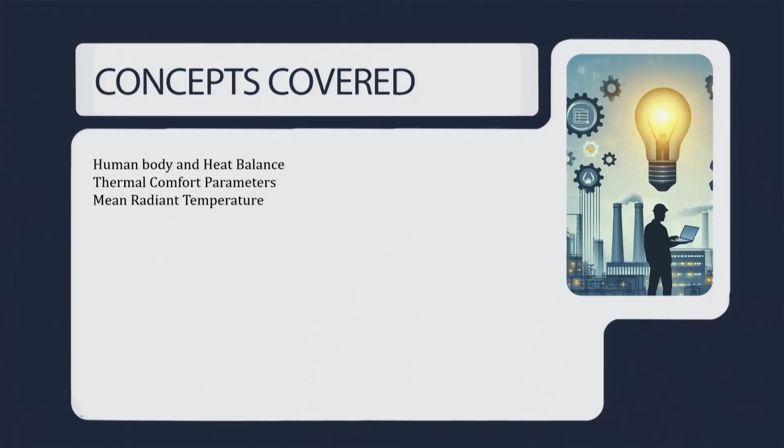So, we will see in this lecture the concept of the human body heat and the heat balance, mainly the thermal comfort parameters, and we will also see one very important concept, the MRT or the mean radiant temperature. In the introduction, we always talk about thermal comfort in our day to day life, and the scientific communities also talk about thermal comfort. How thermal comfort is defined is very important.

It says that it is the condition of the mind which expresses satisfaction with a particular thermal environment. It is the mind, and ASHRAE 55-2004 also stated it in a similar way as ISO 7730 has stated. It is the condition of the mind that expresses satisfaction with the thermal environment, and it is assessed by subjective evaluation. This is very important, it is a subjective evaluation.

So, a particular thermal environment in which I may feel comfortable, you may not; it depends upon a lot of parameters: ethnicity, the dresses, the environment, the way we have been brought up since our childhood. So, there are a lot of subjective parameters. Both codes state that as it is the mind, it has to be some kind of satisfaction of the mind. So, definitely the parameters have to be evaluated by some kind of subjective evaluation.

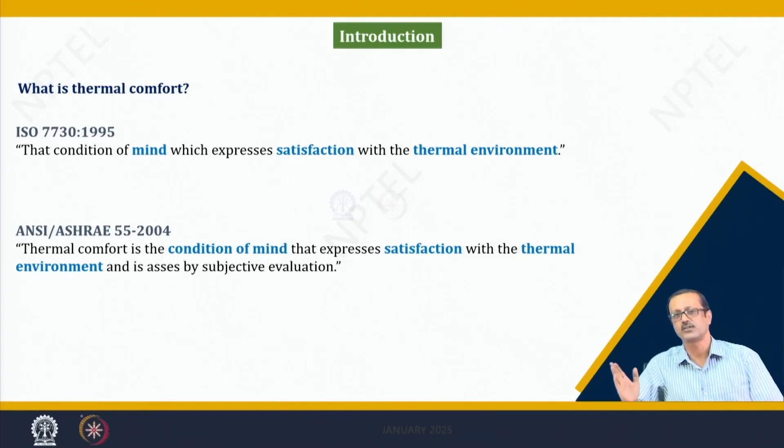So, let us see today in this lecture number 24 what the various parameters are. In lecture number 25, we will see the thermal comfort indices. So, this is the well defined equation that states the heat balance equation of a human body. In the left hand side there are many parameters.

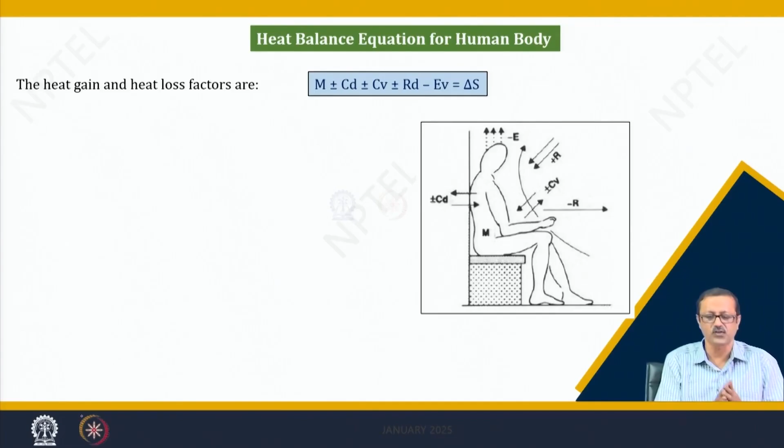It starts with a positive parameter, M. When there is a positive, there are gains. If there is a negative part, there are losses. So, what are the gains? M is always going to be a gain; M cannot be negative, which is metabolism. It is the human body metabolism that will produce some heat. Sometimes it produces a high amount of heat, sometimes it may not.

So, if we are very active, suppose we are running, playing some games, or working out in a gymnasium, the metabolism will be high. But if we are at leisure, sleeping, or sitting in a balcony, the metabolism will be much less. But this cannot be negative.

The next three parameters, CD, CV and RD, are the conduction, convection and radiation. They are sometimes positive, sometimes negative. Conduction is due to the contact temperature difference, between my body and the back of my chair. There may be a temperature difference, so heat will flow by conduction from one part to the other. So, there may be a chance of negative.

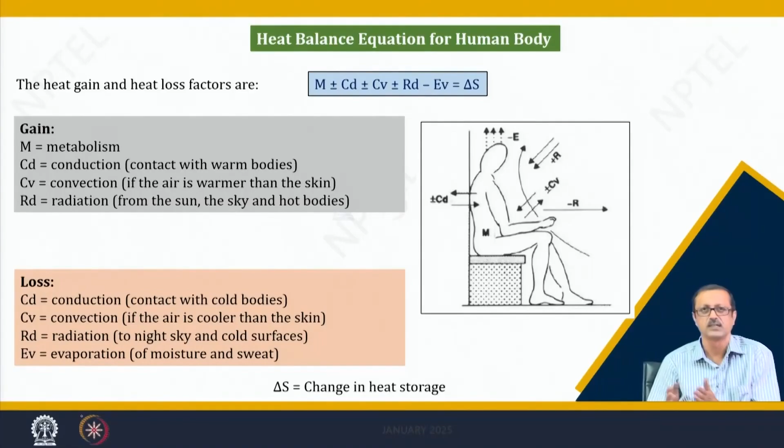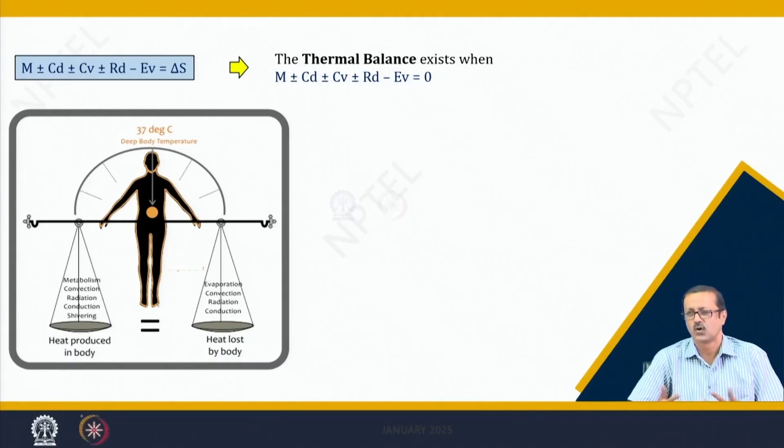So, delta S is the change of heat storage. Our body temperature is about 36, 37 degrees centigrade, around 37 degrees centigrade. There are some losses always happening, there are some gains on the other side. So, if it is thermally balanced, then delta S equals 0, and I can keep my body temperature exactly at 37 degrees centigrade, and probably I will feel very neutral. Of course, neutral is also a type of comfortable, that I am not going to feel any cold, or any kind of hot atmosphere.

How do these environmental parameters relate with these 4 things in my equation? Metabolism is not directly related to any environmental parameter, it is mostly a body biological parameter, and the evaporation is directly or indirectly linked with the dBT, air velocity, and the RH. So, if these are changing, the evaporation rate and everything is going to change.

Radiation between the two bodies depends on a temperature difference, and this temperature difference is sometimes an environmental parameter. Just now I told you, if there is snowfall outside and there is glazing, a window, and you are very close to the window, there is a change of radiation. The convection, yes, there is air velocity, maybe you are in a room which does not have any air conditioner, it has natural air flow. So, the outside dBT temperature will play a role.

There are some human parameters also. Metabolism is, of course, sorry, not psychological, it is the human physical parameter. So, it depends upon the surface area of the human being, the weight of a person, the sex, and the age of a person also.

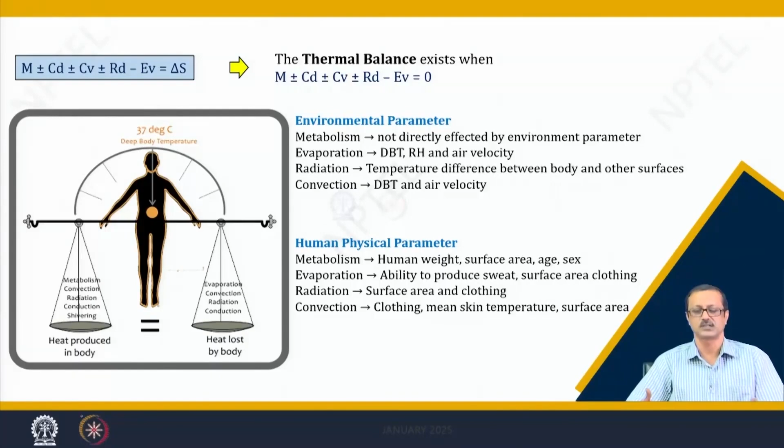The evaporation is also sometimes a physical parameter, its ability to produce sweat, whether your surface area is uncovered or covered with clothing. Similarly, the clothing and your surface area also come into the picture for convection and radiation. So, now if you see there is a balanced kind of scenario in this particular graph.

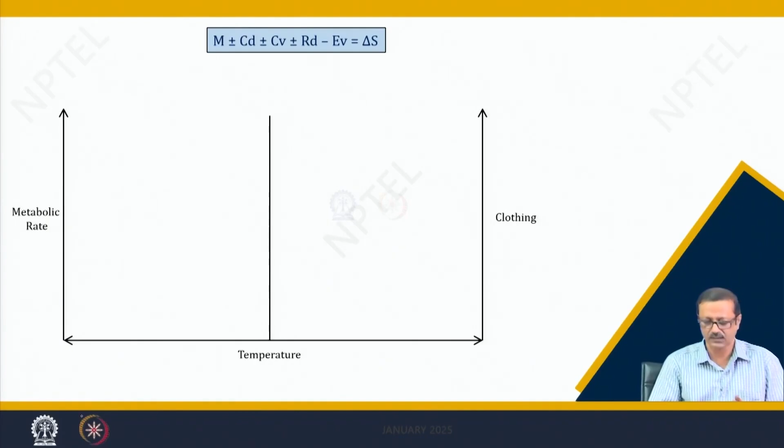On the x axis is the temperature, high or low, based on our body temperature, and at the top I have written down the human body heat storage equation. On the right-hand side of the x axis is the clothing, and on the left-hand side is the metabolic rate. The body temperature will be 37 degrees centigrade, the normal body temperature, when delta S is equal to 0. So your losses and your gains are almost equal and there is no delta S.

But if there is a hot condition, that means the room is hot, there are many more positives and fewer negatives. So this delta S has a positive value. If it is a small positive value, you can accommodate it. If it is a little bit more, you can still accommodate, but if it is finally very high, your body temperature is going to change, because delta S positive means your body temperature will now increase from 37 to 37.5, 38 like that.

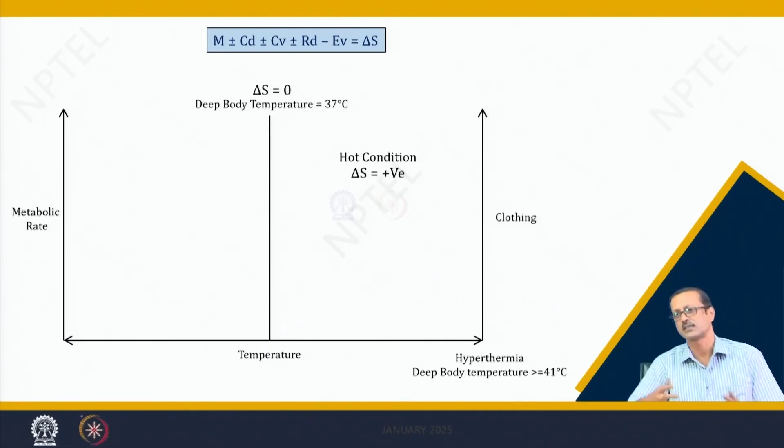And if the body temperature is more than or almost equal to 41 degrees, almost 4 degrees above 37 degrees, which is like a very high fever, you will be really in trouble. You may go into a kind of shock or trauma, sometimes known as heat stroke. In medicine or in our clinical community, they call that hyperthermia.

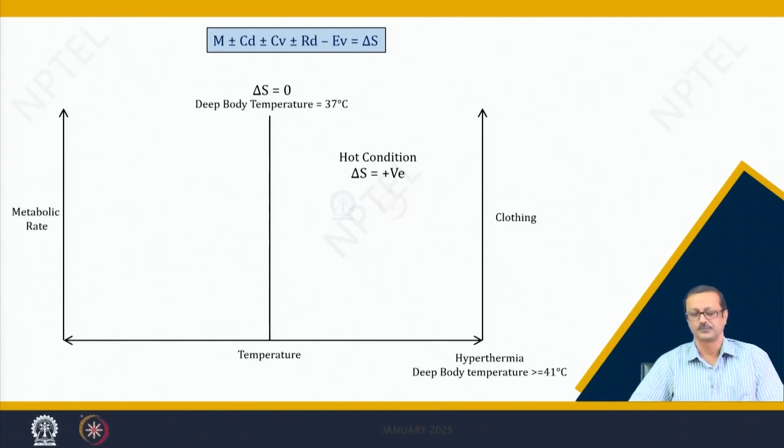So at that time, what we do is we want to increase the heat loss, we try to be more negative. We sweat because it gives evaporative cooling, so the E will be more. We want to remove our clothes because that will increase our body surface exposure to the atmosphere, or we can go for very light clothing. We turn on the fan, because we want to increase the airflow, which will evaporate the sweat from the body. So that again gives some kind of loss.

We increase the body surface and spread out; we can lie in the bed or somewhere. As much as we can, we increase the body surface area, which will actually increase heat loss by evaporation or by convection and all. We also try to decrease the heat production. Heat production comes from M, the metabolic rate. So we want to decrease that.

So we will stop eating. If you eat, it will start giving you a lot of heat generation also. We will stop eating, we will decrease any activities, we will not go for any kind of exercise. So you see, we have light clothing, and we have a low metabolic rate; we can sleep, we can lie down, something like that.

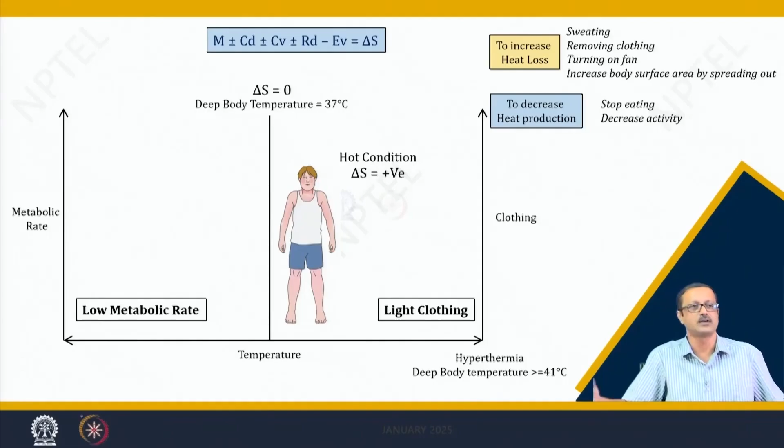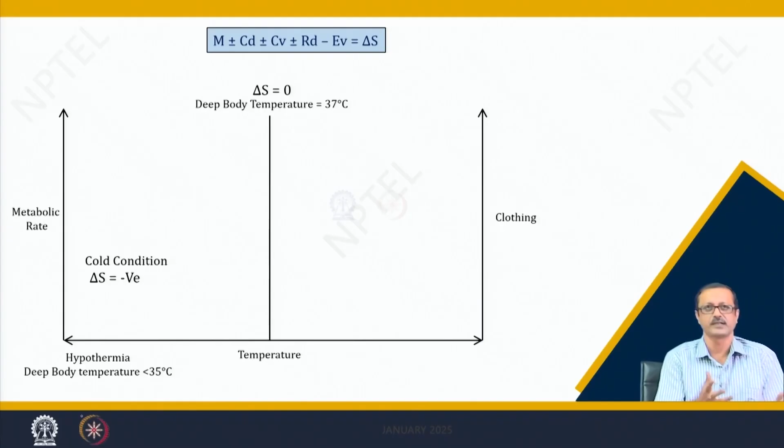In other words, if you go to the other type of scenario, the cold condition, when it is very cold, the delta S is negative. If this delta S is negative, it will decrease your body temperature from 37 to lower, and if it is less than 35 degrees, you are again in trouble. It is called hypothermia, and you may have some kind of attack, a cold attack or something like that.

In this scenario, we have to decrease the heat loss; we do not want to lose heat. So, number one, there is no sweating; our body is not going to sweat. Number two, we will wear heavy clothing, because we do not want to lose any heat from the body. So we will have winter clothing, and we shelter from the wind; we do not want any fan movement. And we will reduce the body area by folding arms and legs.

So we will not spread out; we will reduce our body surface area. And on the other side, we will try to increase the heat production. So we have to increase the metabolic rate.

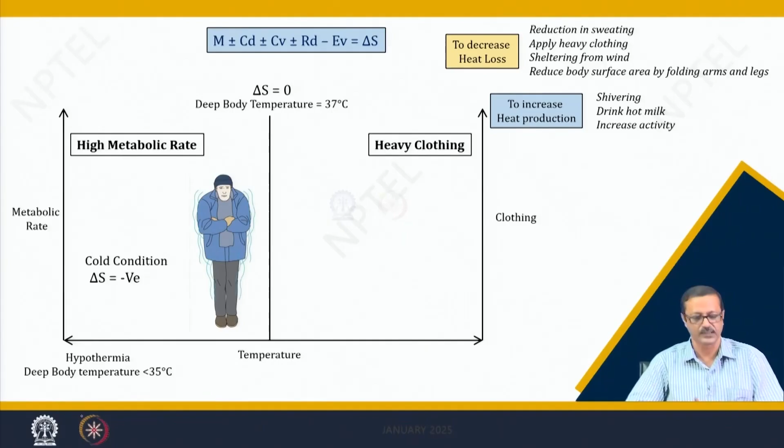So, there are 2-3 ways. We will shiver; shivering will do some more work, and that will produce some kind of heat. We may eat something, maybe hot milk, that will increase my metabolic rate, or we will do some activity, shivering or some activity, we may run, or do some kind of activity which can produce some kind of heat. So, that way these two things will be balanced with each other.

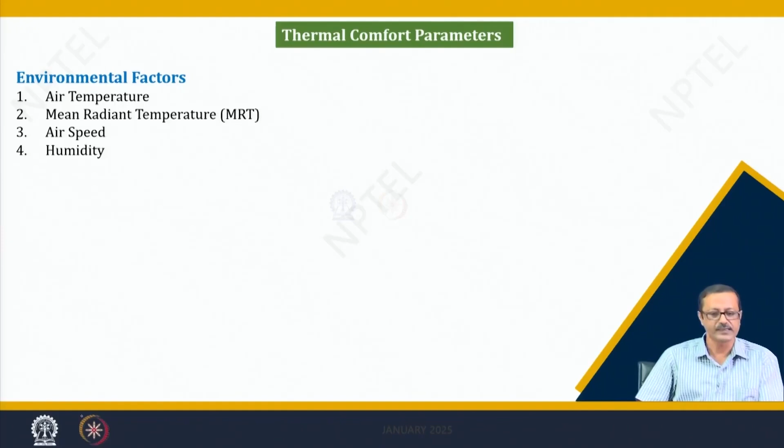So, from this perspective we can see the thermal comfort parameters depend upon so many environmental parameters, mainly these 4 environmental parameters: the air temperature, we all know DBT, the mean radiant temperature MRT we will discuss now, air speed and the humidity, whereas there are some personal factors also. The first 2 personal factors are very important, the activity, which is the metabolic rate, and the clothing. The amount of clothing also plays a role in your heat balance condition, and that leads to the thermal comfort also.

Other than these 2, activities and clothing, which you can map, the state of your health, the adaptation or acclimatization, the body type, whether you are thin or fat, your age, gender, genetic or ethnic group, which kind of climatic area you are coming from, in which climatic area you have been growing from childhood, those parameters are also going to affect, but those parameters cannot be mathematically modeled.

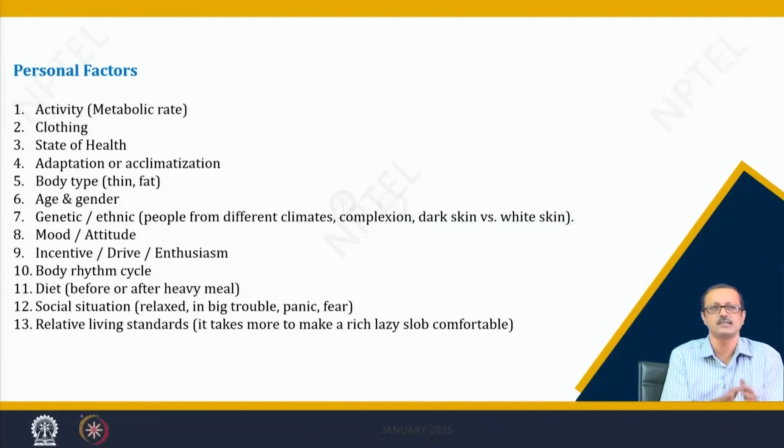Your mood or your attitude, your drive or enthusiasm, body rhythm cycle, your diet, your social situations, whether you are relaxed, whether you are in fear, whether you are in a panic. So, if you are in a stressed mental condition, those also come into play. Also your standard of living sometimes comes into play, if you are rich or whatever. So, those parameters from 3 to 13 cannot be mapped properly; that is why it has been told that thermal comfort is a subjective parameter.

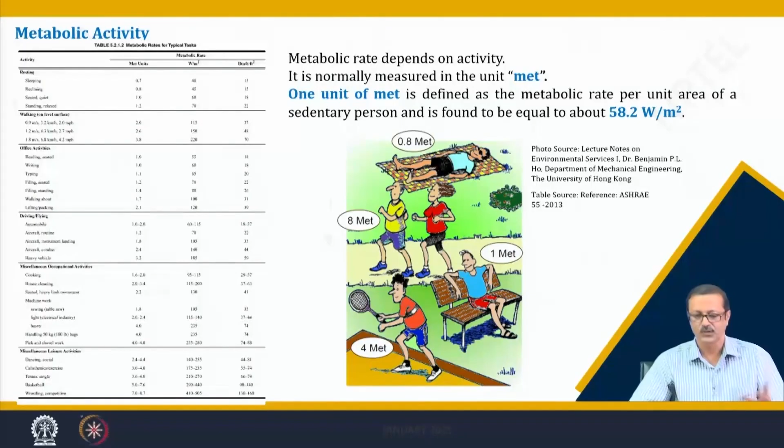Suppose it is sleeping, you are 0.7; if you are standing and relaxing, it is 1.2. Suppose you are doing some kind of shovel work, it is almost 4.8. So, heavy work is more. Somebody sleeping in this particular figure is 0.8 MET, somebody playing badminton or maybe table tennis is 4 MET.

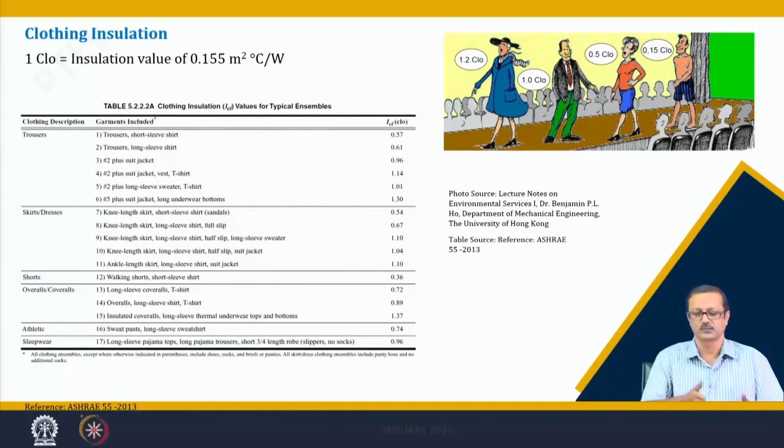Now the clothing insulation: depending upon our different type of clothing, it changes its value. If you have light clothing, only Bermuda or something like that, a thin scenario, it is 0.15, and if it is very heavy winter clothing, it may go up to 1.3, 1.4 also sometimes. So, based on that, it changes.

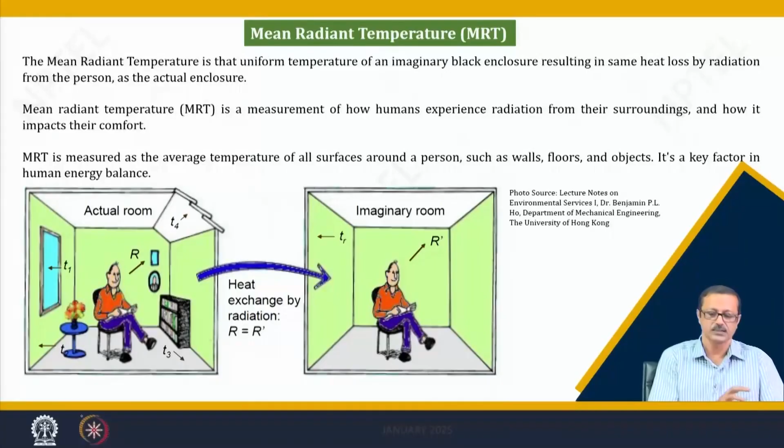Next is the mean radiant temperature. Conceptually, inside an interior room, all the surfaces and also all the equipment and furniture radiate heat in some form, and based on that an imaginary room has been conceptualized which can be treated the same as the actual room if there is the same amount of radiation heat exchange from the surfaces.

So, based on this phenomenon, we consider the various objects and surfaces. There may be wall, ceiling, some light, some kind of room heater, even some table or chair, which sometimes act as a heat generating source. From those sources the heat flux radiates towards the center or the other side, and the heat flux flows from the higher temperature to the lower temperature zone.

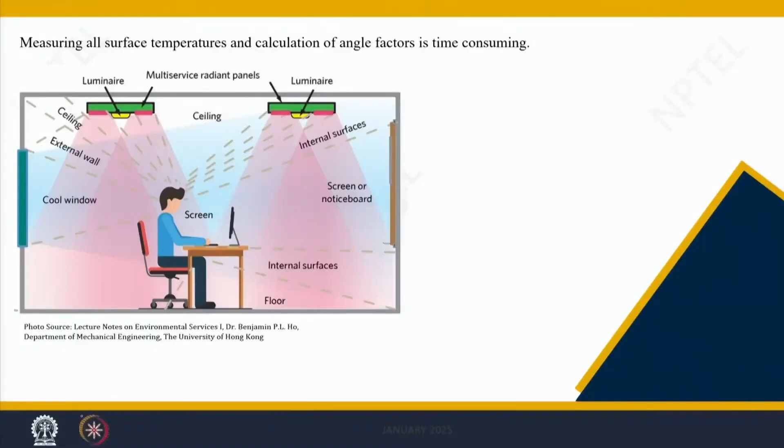Imagine we can think of the center, or any point, in a particular room. Suppose in this classroom I am sitting in one of the corners. If I want to find what the mean radiant temperature will be at this particular point, I need to see how much exposed 3-dimensional area I have from the different radiating bodies, such as the wall, ceiling, or some kind of equipment or furniture. Based on this concept, Belding's formula can be used to find it out.

There are various formulas to find this out, but this is one of the easy ways to find the mean radiant temperature, where Tg is the globe thermometer temperature. The globe thermometer is actually used to find the mean radiant temperature, but not directly. You have to use the globe thermometer temperature in this equation, where Tg is the globe thermometer temperature, Va is the air velocity, and Ta is the dry bulb temperature.

So why globe thermometer? A globe thermometer is a normal thermometer kept within a black colored globe, so it appears to be, or is assumed to be, a black body, and it collects all the heat from the 3-dimensional surfaces. So it definitely has a slightly higher temperature with respect to the ambient air temperature, which we call DBT. Based on this, there is a difference, Tg minus Ta, which will always be positive, with the globe thermometer temperature slightly higher, maybe by 0.01 to 0.5 degrees.

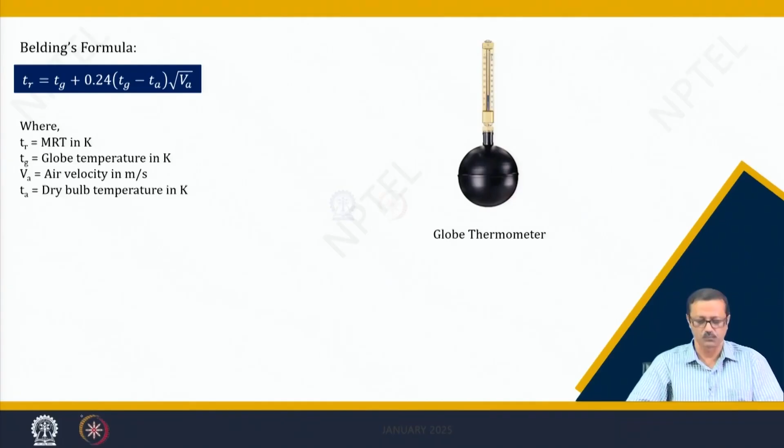Sometimes if it is on the topmost floor, and the ceiling is exposed to a hot outside temperature, then maybe 2 to 3 degree changes can also be noticed. This term within the bracket is always going to be positive, and it is under root V, the velocity, so it will be a little less. By virtue of that, the mean radiant temperature Tr will be slightly above the globe temperature. If there is no air velocity, theoretically we can say it is equal to the globe temperature, otherwise it will be a little more than the globe temperature.

So how can we find this out? One way is directly with the globe thermometer, but if we know the partition wall, the exterior wall, and the ceiling temperature, then theoretically in a 2-dimensional way, or approximately, we can calculate it.

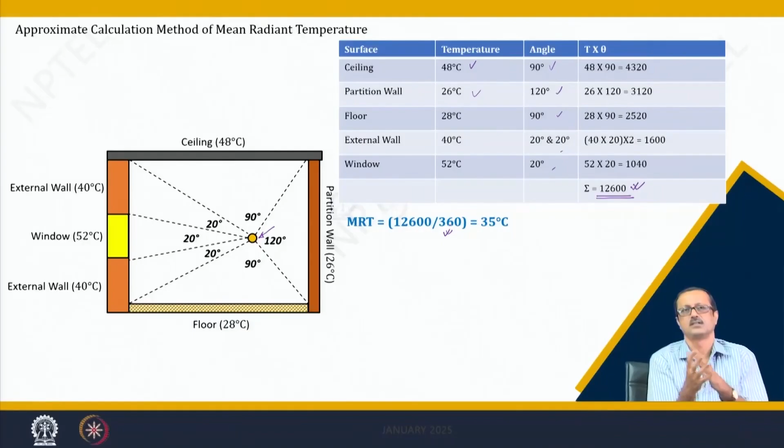So, the angle multiplied by the aperture angle multiplied by the object temperature, summing up and divided by the whole angle, that is 360, can give you the MRT value.

Sometimes there is a radiant asymmetry. This means suppose you are situated in a certain position in a room, and two parts of the room, maybe top and bottom, or left side and right side, are having two different extreme temperatures. Maybe there is a window radiating heat at around 52 degrees, whereas the other side is a partition wall or window exposed to another room, which may be an air conditioned room, and that window may be around 18 degrees. So how close you are to the 18 degree window, or how close you are to that 52 degree window, based on that there is a radiant asymmetry.

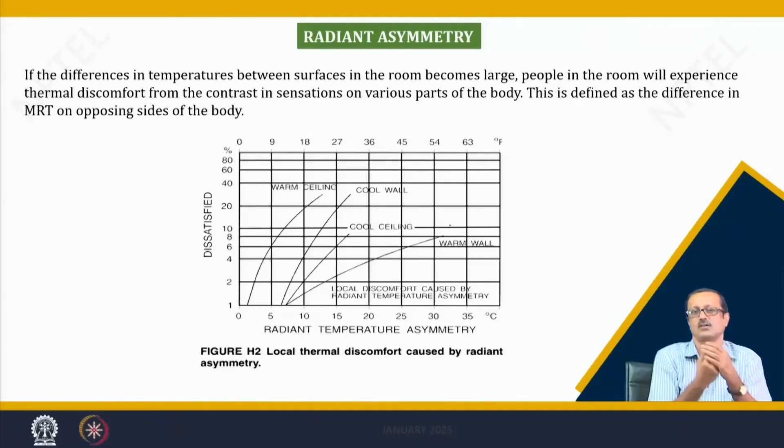Your back side may feel so cold, and the front side may not feel that much, because it comes under the thrust of the radiant heat. So that is a kind of asymmetry.

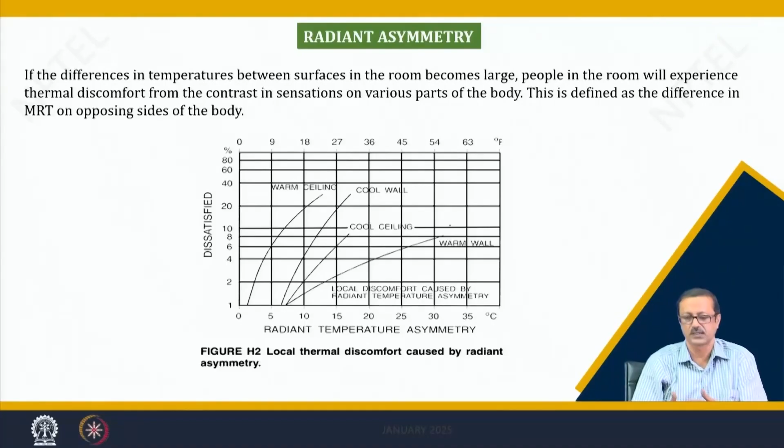Asymmetry is calculated, and the percentage of people dissatisfied, again a subjective criteria, is placed on the y axis, and the radiant temperature asymmetry is placed on the x axis. The lower part is Celsius and the upper part is Fahrenheit. So there may be a warm ceiling, a cool wall, a cool ceiling, or a warm wall. There are various scenarios.

This radiant asymmetry can also be calculated like this. So I have calculated a radiant asymmetry where the ceiling temperature is 60, whereas the floor temperature is 20 - a very asymmetrical scenario. The wall temperature is 30. I have distributed the angles with 60 degrees for the wall and 120 degrees for the ceiling.

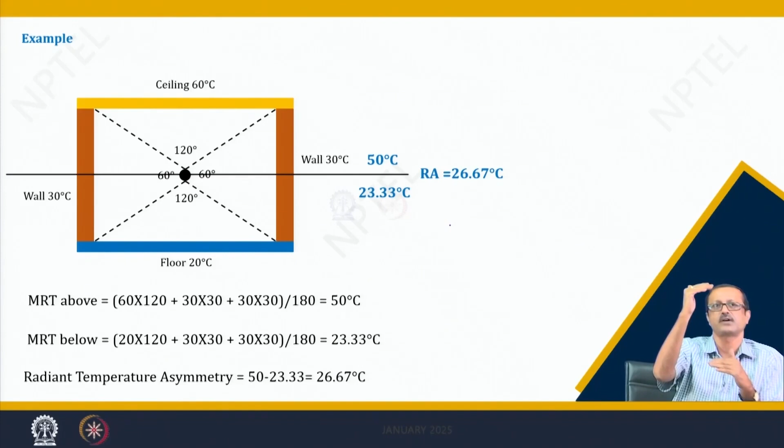I have calculated the MRT above that point, the black dot, my point of interest. The MRT above will be high because it is exposed, 120 degrees, to the ceiling at 60 degree temperature. That gives you almost 50 degree temperature in the MRT above, whereas the MRT below will be less, because 120 degrees is exposed to the floor, which is lower temperature, only 20 degrees.

This 20 degree temperature actually creates an issue. All other parameters are the same, the wall and all are the same, 180. So this is going to be 23.3. So the asymmetry lies between 50 and 23.3 - there is a 26-27 degree asymmetry between the above and below.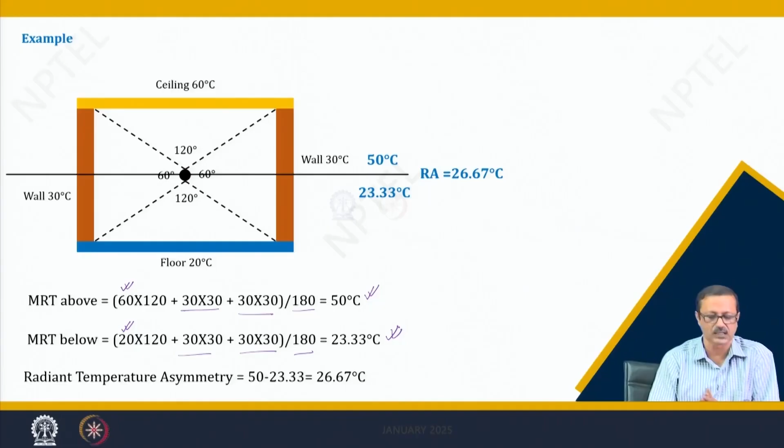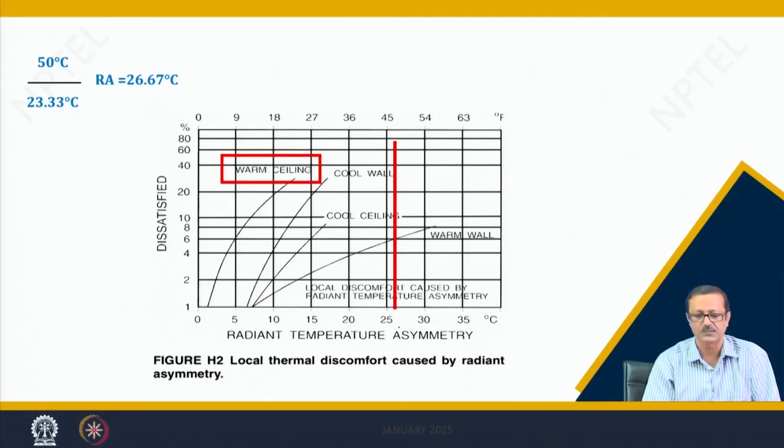Let us see what happens if it is 26 degrees. I drop a line from 26 degrees, and if it is a warm ceiling, I may say this leads to very much discomfort, because this may lead to somewhere more than 80% of people being in discomfort. So something like that is the radiant asymmetry.

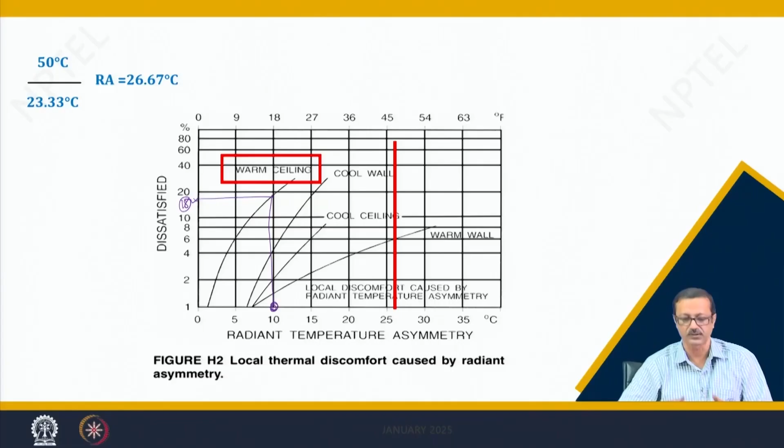This radiant asymmetry is also going to bother a person. If 10 degrees is the radiant asymmetry, and if it is due to a warm ceiling, around 10 to 20 percent of people will be dissatisfied with that. In my case it is 26 degrees, so much more people will be dissatisfied, almost about 95% of the people will be dissatisfied with that. So that is the radiant asymmetry.

So what we discussed today is the thermal comfort of a human body - we understand the body heat balance equation. We also understand that it depends upon some environmental parameters like air temperature, relative humidity, air speed, and the mean radiant temperature. We have thoroughly discussed the parameter of mean radiant temperature. There are two more responsible parameters also there, which are metabolic rate and clothing insulation.

So in the next lecture we will go to the thermal comfort indices. Thank you very much.